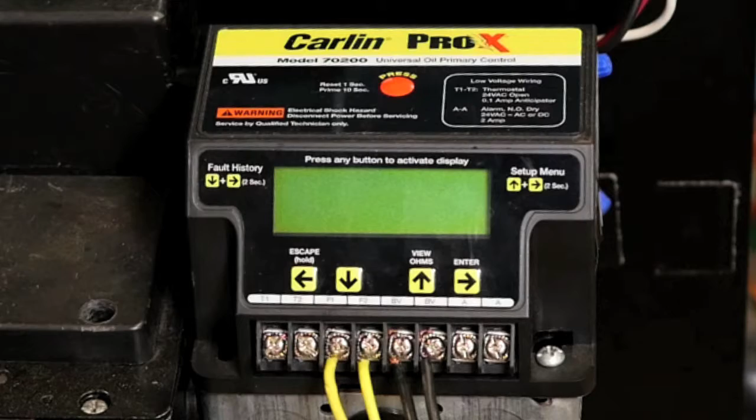In this video, we will discuss and install the Carlin Combustion Air Proving System, or CAP system. The CAP system is designed to work with the Carlin Pro X 70200 primary control. It utilizes the BV contacts and blocked vent feature to shut down the oil burner in the event combustion air supply is interrupted or blocked. If no airflow is detected during startup, the Pro X 70200 will abort startup and shut down the burner.

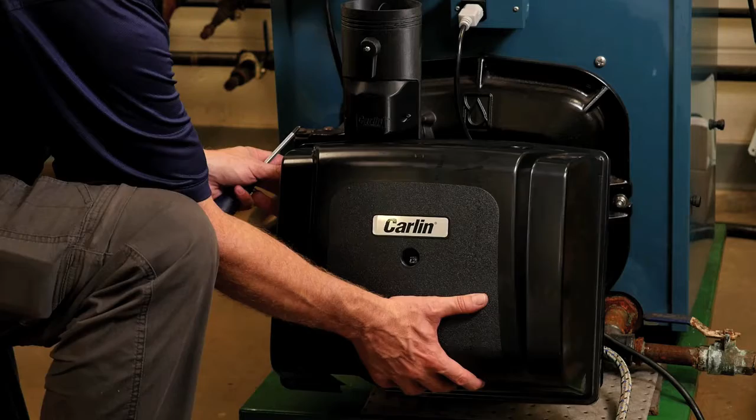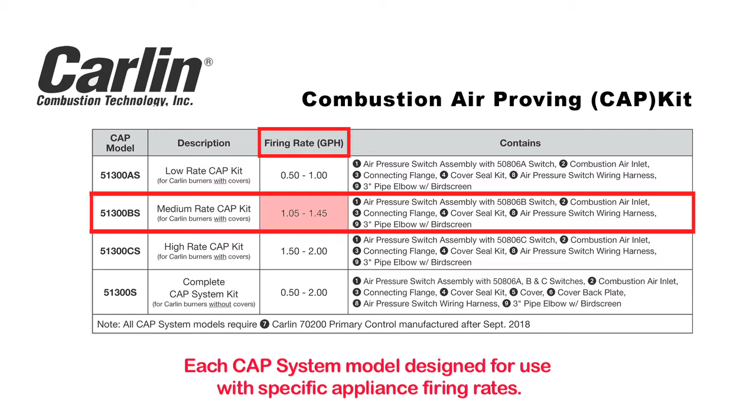If the air intake is not blocked during startup, but becomes blocked during a normal run cycle and remains blocked for 20 seconds, the oil burner will shut down and make up to 3 attempts to restart. The Carlin CAP system works together with the Carlin burner cover and back plate to form a sealed intake system that can be connected directly to the outside for combustion air. The CAP system is available in several models, as a CAP kit standalone or with a burner cover and backplate.

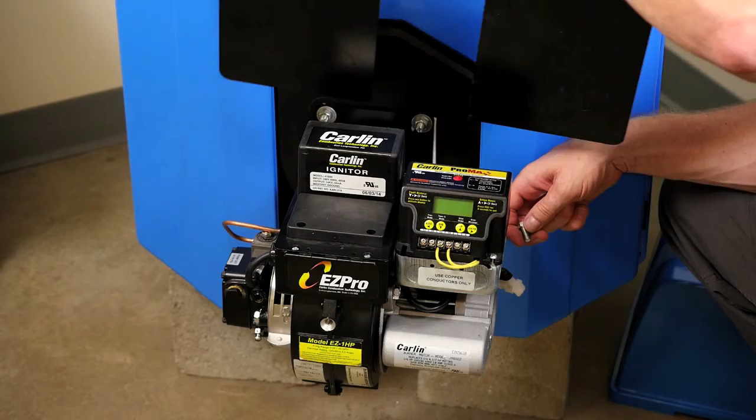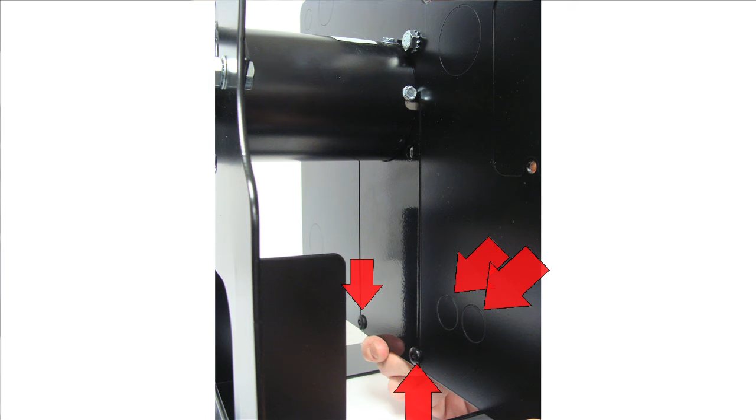To install a CAP system, follow these simple steps. Before you begin, disconnect all power to avoid electrical shock or damage to the system. Mount the burner cover backplate and filler plate to the burner chassis. Use the included plastic rivets to align both plates. Route the oil lines and all wiring through one of the knockouts in the backplate. Use the grommets and plastic plugs provided to seal all openings in the backplate. Be certain to install the rubber filler into the bottom of the burner cover.

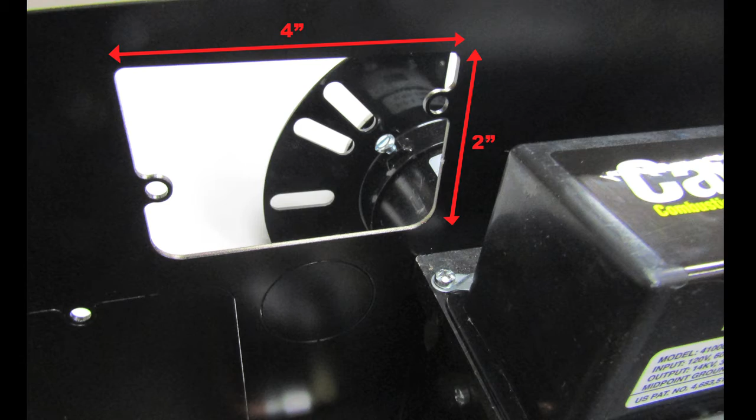Select the best orientation for installing the air inlet adapter. The CAP system adapter may be installed in either vertical or horizontal. A 2-inch by 4-inch knockout is provided in the back cover plate. Note that the maximum length of pipe from the burner to the outdoor termination should not be greater than 80 linear feet. Each 90-degree elbow adds 10 linear feet to the total length.

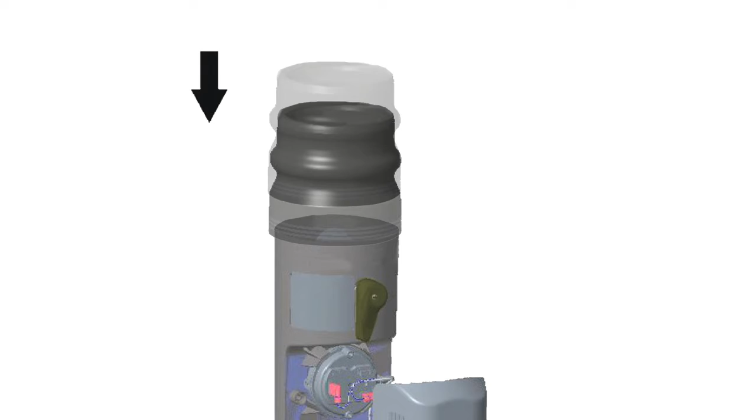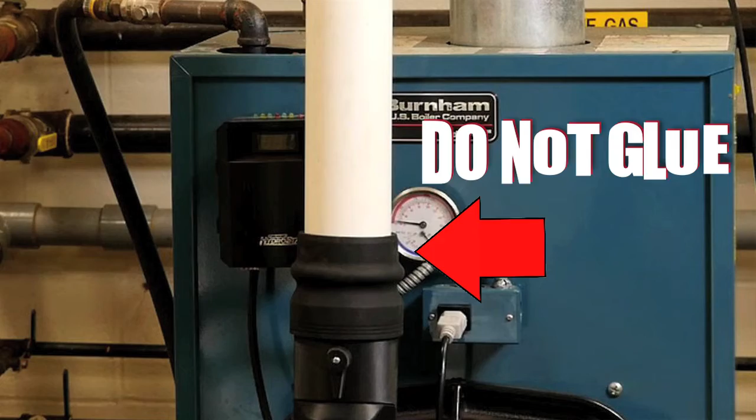Once the air inlet is secure, slide the connecting flange onto the air inlet until secure. Use 3-inch Schedule 30 or Schedule 40 PVC pipe. A tight fit and PVC solvent cement is necessary to assure a leak-free connection. Do not glue the PVC pipe to the connecting flange. The outdoor termination provided uses a bird screen for protection from any nesting critters.

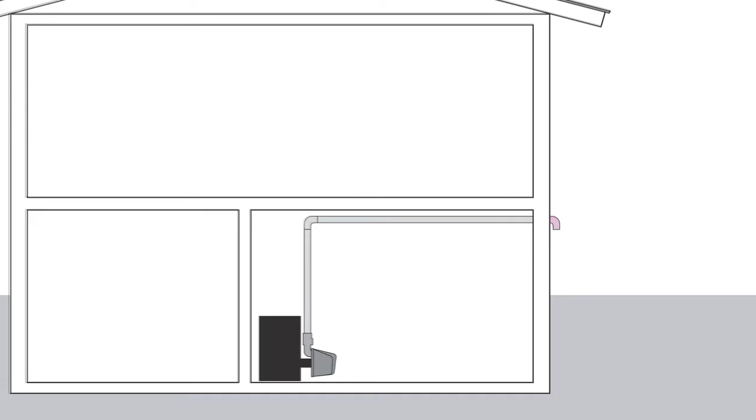The outside termination must be 12 inches above grade or the highest anticipated snow level and away from locations where snow drifts may accumulate. Combustion air intake should not be any closer than 12 inches to any vent inlet or outlet. Always use sweep elbows for all combustion air piping. With all intake piping connections in place, check for proper support and check all joints.

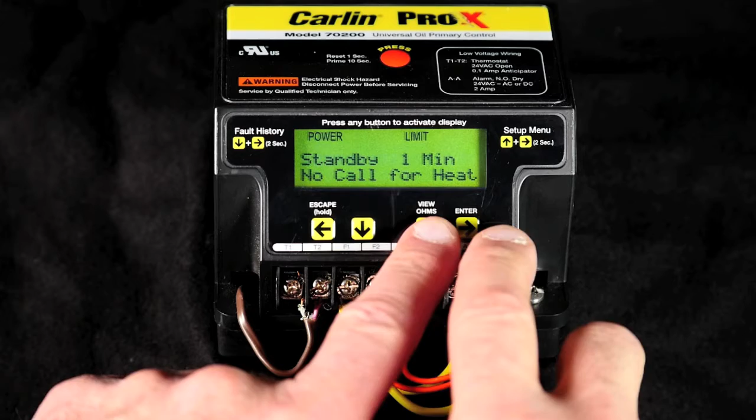Route the wire leads from the air inlet switch to the BV contacts on the Pro X 70200 primary control. Only a Pro X 70200 manufactured September 2018 or later will have the block vent air intake feature. To activate this feature, you must enter the setup menu. The setup menu cannot be accessed while the burner is running. Eliminate the call for heat for standby mode and press the up and right arrow keys together for 2 seconds.

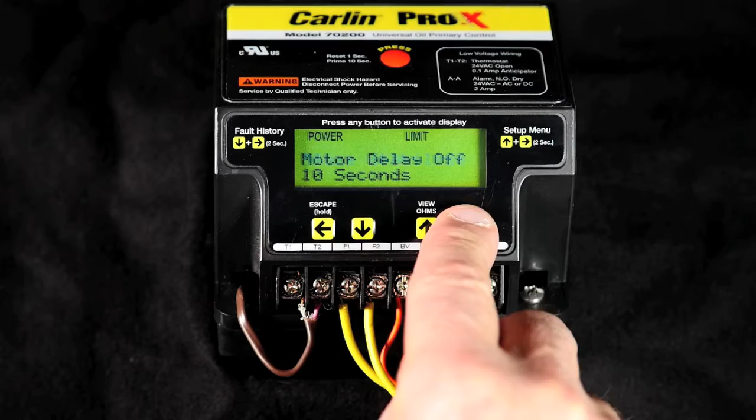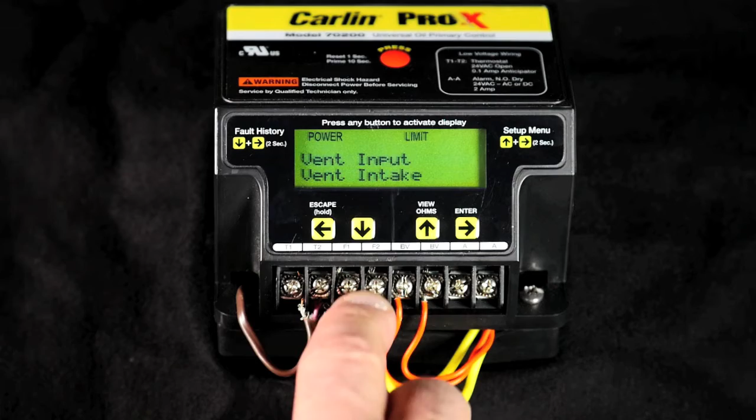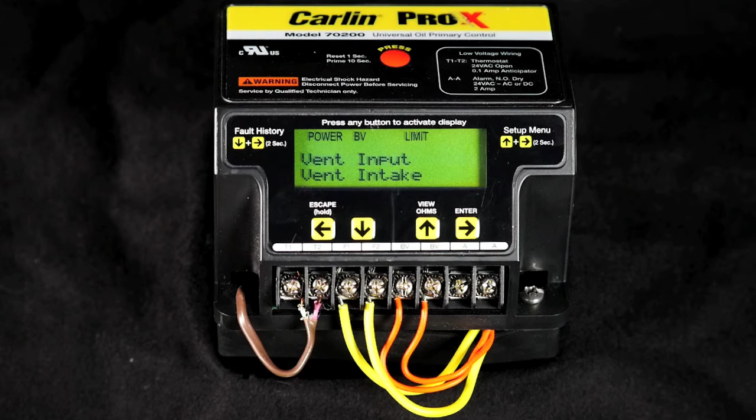Now, using the right arrow key, scroll through the different settings until you reach vent input. Now use the down arrow key and scroll down to vent intake. While intake is still displayed, press the right arrow key again to make the change. The word entered will appear, indicating the change has been made. Press and hold the left arrow key for 3 seconds to exit the setup menu.

Now mount the burner cover by aligning the two holes in the top flange of the cover with the two mounting tabs on the back plate. Pivot the cover into position onto the oil burner and tighten the mounting screws located in the center of the cover. Tighten securely to prevent room air from leaking into the cover. The oil burner is now ready to operate.

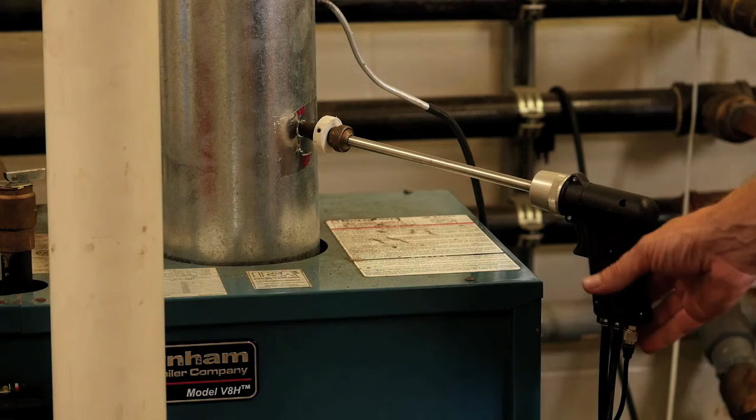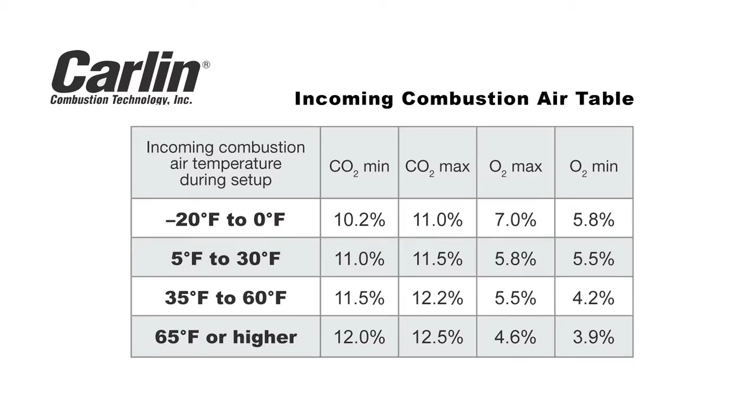Since adding a cover and a ducted air intake, the combustion characteristics of the appliance may change. So it is important that a combustion test is performed to ensure proper operation. Outside air for combustion will fluctuate by season and will significantly impact combustion. Use the table based on outside air temperature at the time of setup to ensure proper burner setup. When testing combustion, always reinstall the cover after making adjustments. It is sometimes necessary to repeat this process more than once for proper setup.

With the burner setup complete, the final step is to test the CAP system operation. With the burner firing, move the test lever to a test position. Following a 20-second delay, the burner will shut down. The Pro X 70200 will allow the burner to recycle up to 3 times in order to prevent nuisance shutdowns caused by temporary blockage or high winds. If the blockage persists, the burner will shut down and a lockout will occur.

The CAP system operation should be tested at least annually. The ducting and outdoor termination should also be inspected annually. If the burner does not shut down during testing, check that the burner cover is tightly secured and properly sealed. Check for proper installation of all components in the burner seal kit. Check that the correct air pressure switch is installed based on firing rate of the burner, especially if the firing rate of the burner has changed. And check that all wiring is correct.